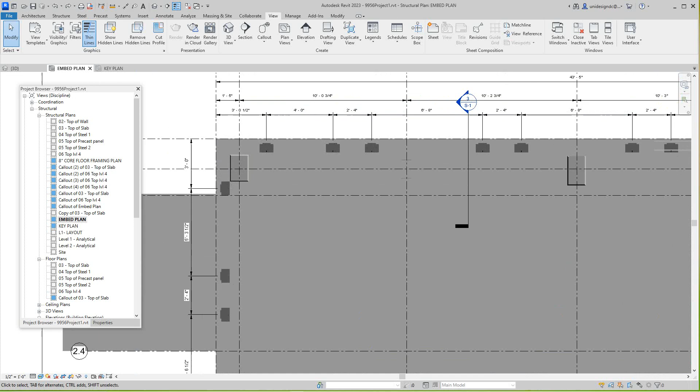So here we're going to continue on with this model, and we're going to look at a set of drawings used in precast. This drawing is our embedment plan, and it shows all the plates, the embeds that are going to hold these panels up. These are strategically laid out. Let me cut a section through this one so you can see. This is the embedment plan, and it basically sets out all the dimensions for the embeds.

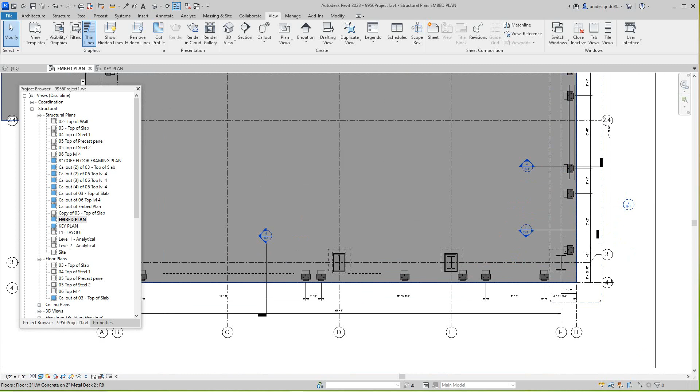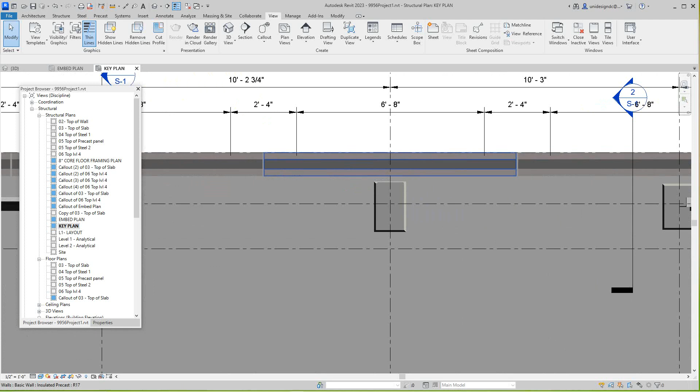It probably should be a layout here. Let me see, layout one. Nope, that's not it, uh-oh. So anyway, this drawing here, this key plan.

But anyway, what I'm going to do now - I know what happens here in precast, these drawings are not going to show that dimension. They're going to be in the elevation. So I'm going to drop a new section in here.

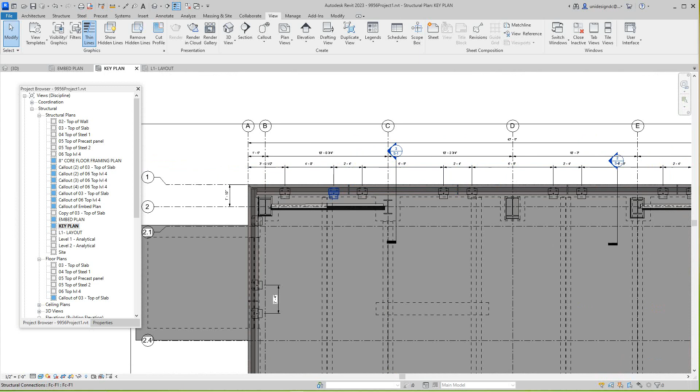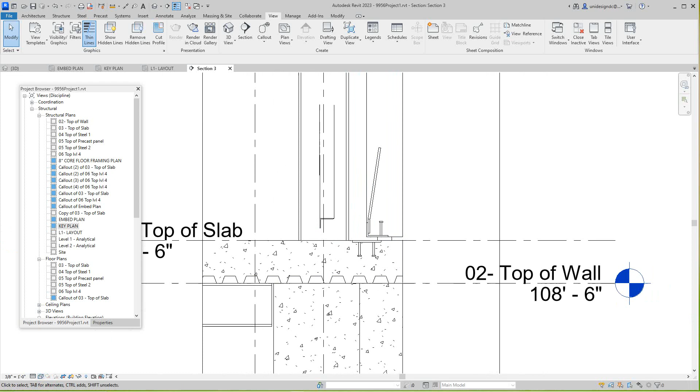Or I can just open this one actually. So there's a section right through there, and there's that connection plate. Let me see if I can put this in wireframe. So that's what's happening in there. Let me go back to consistent colors.

Or maybe I'll cut it straight through the piece. So I'll go back to the embed, and I can go in any plan really. Let's go back to the key plan. Yeah, we'll cut it in this one because this drawing is really what shows it.

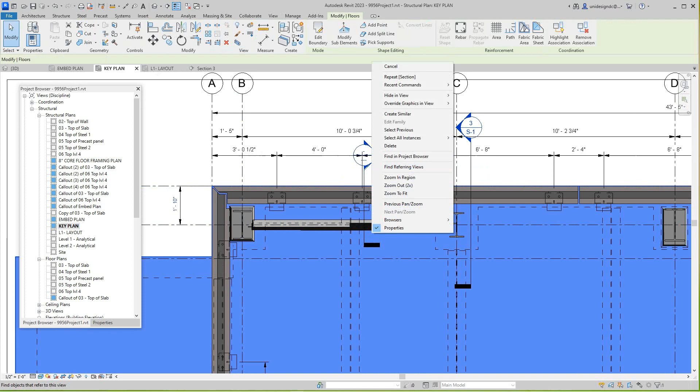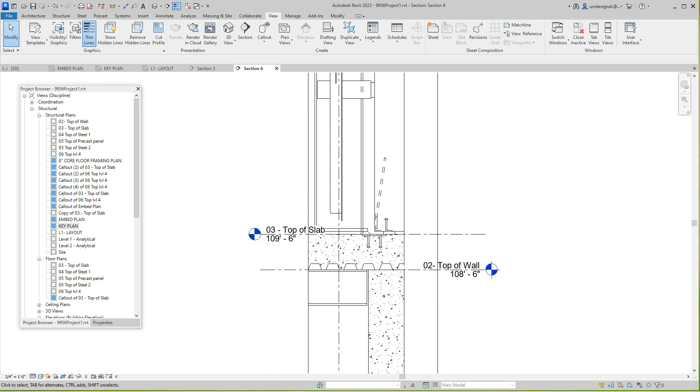Okay, now I'm going to pop that, cancel that. I'm going to pop that around that way, and we can see what's going on here with this connection. So let's change the scale to 3/4. Make this fine. Let me make it a shaded view so you can see what's going on here. So here's the connection between the base and the wall panel.

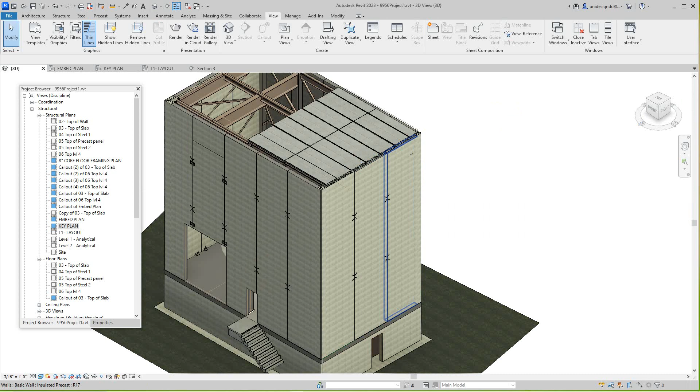Now, another thing you would know is the elevation. So what I'm going to do here is go to my 3D view. We can turn this guy off. Let me go into our 3D view here. So these are elevations, and then what's going to happen here is, let's go into our east elevation here.

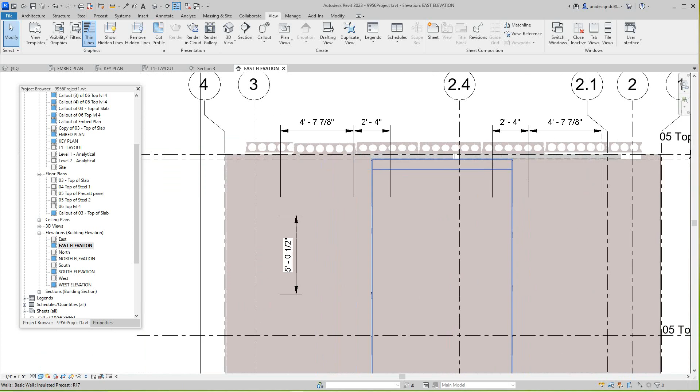Okay, now here's where - uh-oh, they didn't get this one right. Let me see, I'm going to have to do this, folks. I'm going to have to get this cleaned up here, measure these wall panels, because I'm sure they do. But as long as - let me see if I can do this right quickly.

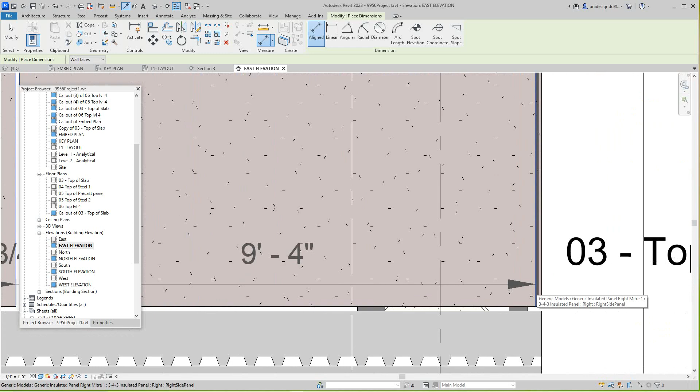See, we need that dimension as well. So I have to finish these elevations up. You could show these in plan view, but I think normally they would do it in this view. I'll just drop that there like so.

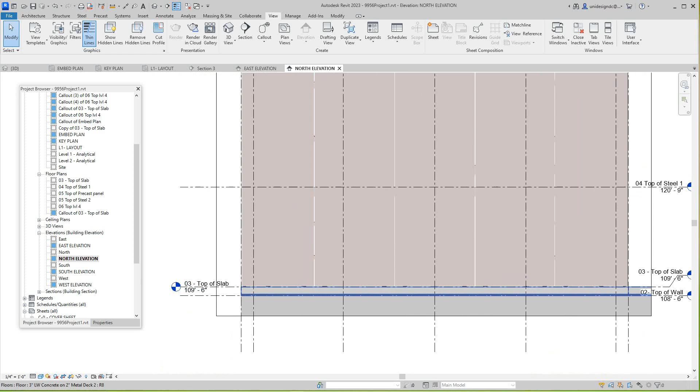Let's go over to my north. Make this a shaded view. Even these vector connectors can be dimensioned. So everything in - this is how I would do this. So I'm going to just go here.

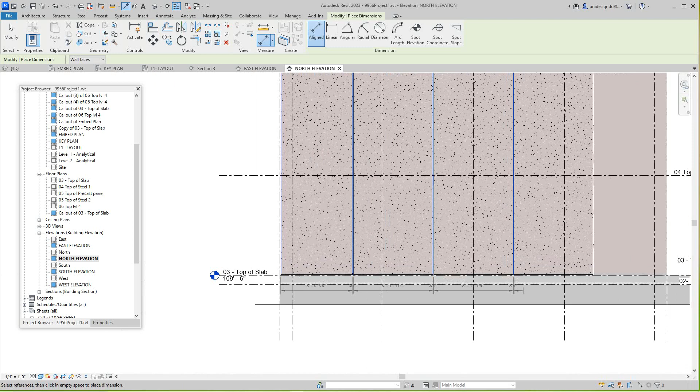I remember, we go here, this guy there. So when you highlight it, you can just snap it. I know y'all have seen me do this before. I don't want to bore you with it, but I don't like making long videos. So here's that, that's how that, there you go.

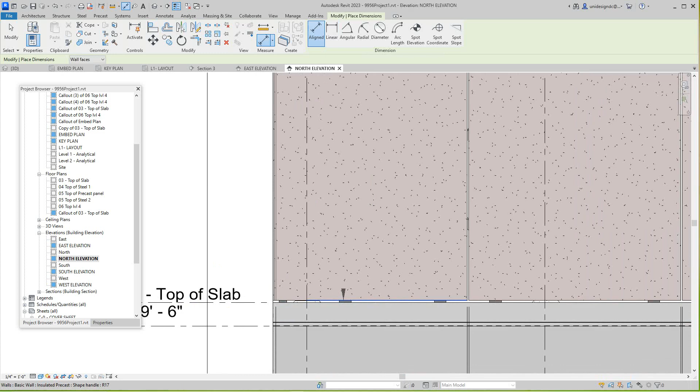So that's how you would dimension the panel and the gap, plus you would have a regular piece ticket. And then going in this direction, I'm not going to do this whole thing. You would go from the bottom of the panel to the vector connector here.

And there'd be another one there, and then to the top. Pull that over there. So that's how you would do your elevations.

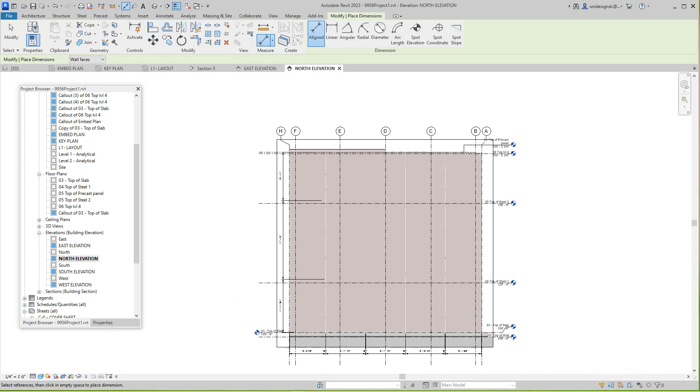So quickly here, let's go look at - let me see here, we got some, I'll tell you what I might do, I might leave that to the next video: how would you reinforce this. But let's go to the south elevation now.

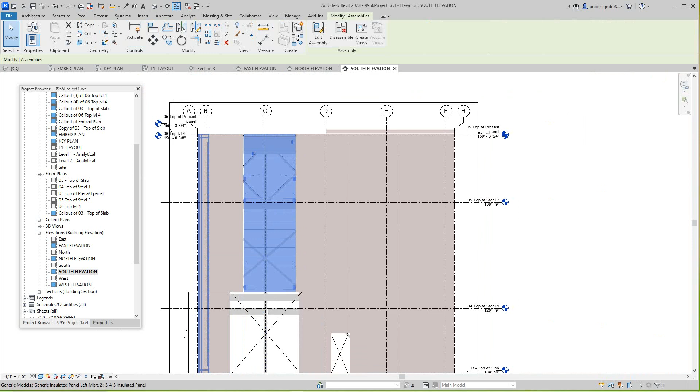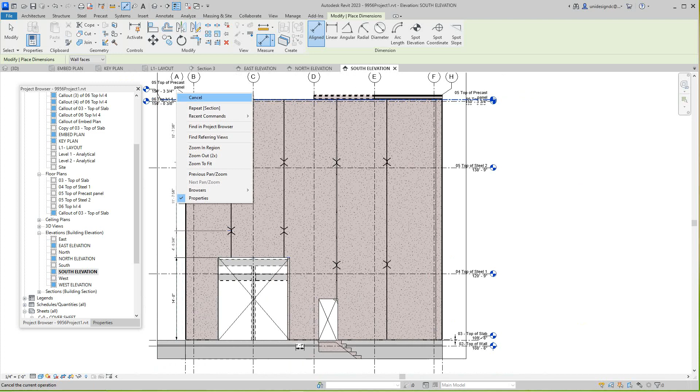So you get the idea of this. Now you have partial dimensions or partial plans of the top. So that's another place that they would put the dimension for that. Let me see if I can go top here, level 4, top slab.

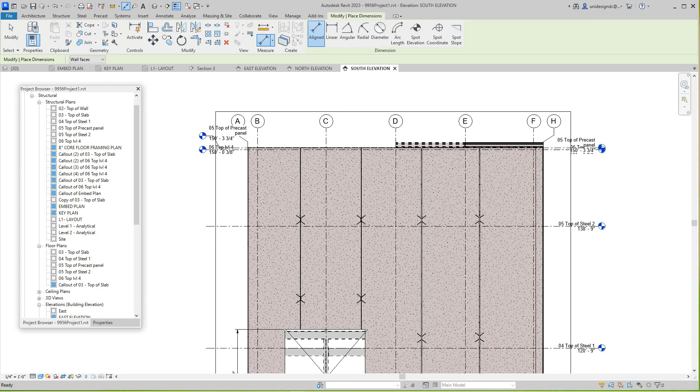So now these are part plans, and I can show you how to make these another time in another video. They can get a little tricky, but anyway guys, I'm going to leave it there.

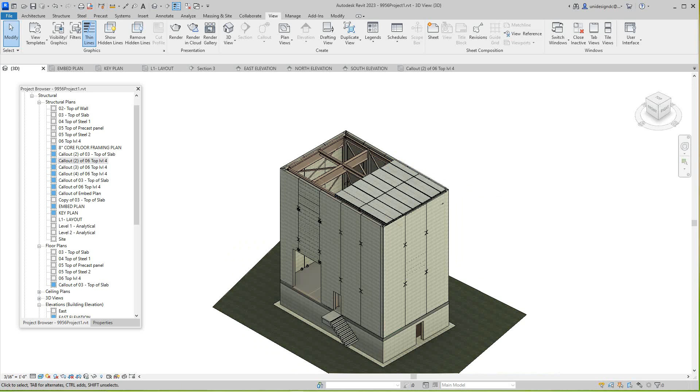I just wanted to show you how we would dimension our grain mill and the different drawing aspects of this. So basically, if I window tile all these, you have your embed plan, which is this guy. And then you go with the key plan that shows you the layout of everything in place, the connections and the wall panels, and then you have your elevations.

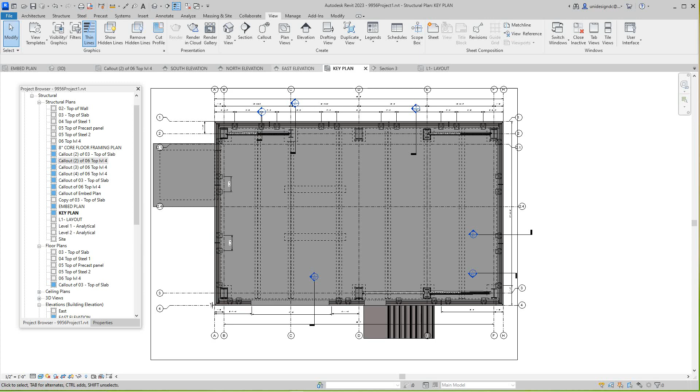Well, that's not a completed one.